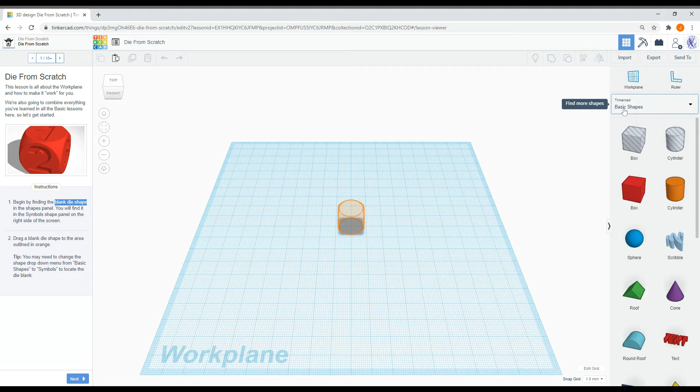So let's get started. Begin by finding the blank die shape in the Shapes panel. You will find it in the Symbols shape panel on the right side of the screen. I don't know what they mean by Symbols shape panel, but over here in Basic Shapes, there is a blank die shape, and that's what they've asked us to find.

So I'm going to go ahead and get that out and move it to the target. I'm going to zoom in a little bit and use the arrow keys on my keyboard to put that where I want it to be. There you go.

We're going to drag the blank die shape to the area outlined in orange. You may need to change the shape drop-down menu from basic shapes to symbols. I'm not sure what they mean by that. I don't see symbols in here anymore. I think they changed this menu. Anyways, it's right there under basic shapes.

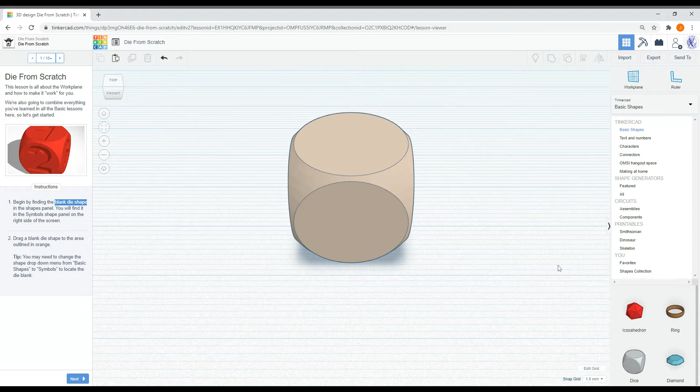Let's go ahead and do the next page. So, die from scratch. The following lesson is part of a bigger Tinkercad project. Check out this and more projects on Tinkercad's Instructable page.

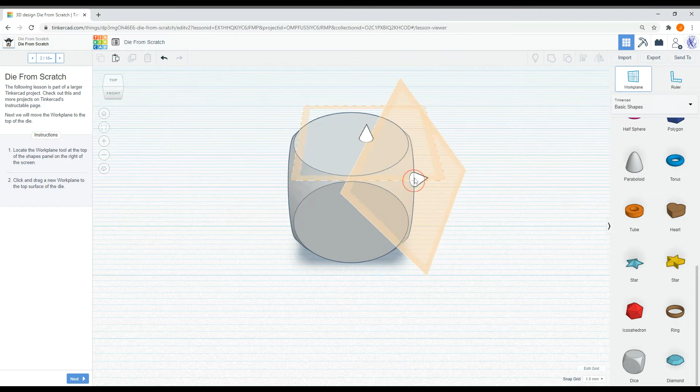Okay, so we're going to locate the workplane tool in the top right workplane tool, and we're going to click and drag a new workplane to the top surface of the die. I can put it on different surfaces of the die. I'm going to put it on the top surface. They even put a little white thing there to try to help you figure out where to go. Next.

Great job, right? So your workplane will now appear as if it were sitting on top of the die. And you can see that the orange graph paper does seem like it's sitting on top of the die there.

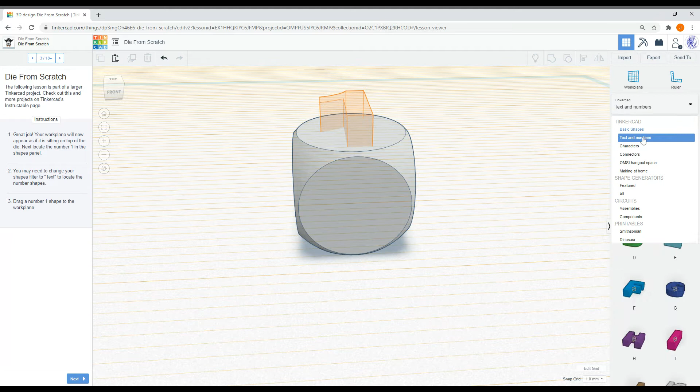We're going to locate the number 1 from the Shapes panel. Now, for here, we're looking for text and numbers. And we're going to go to page 2, and there it is, the number 1. You may need to change your Shapes filter to say text and numbers, okay, because we can do that.

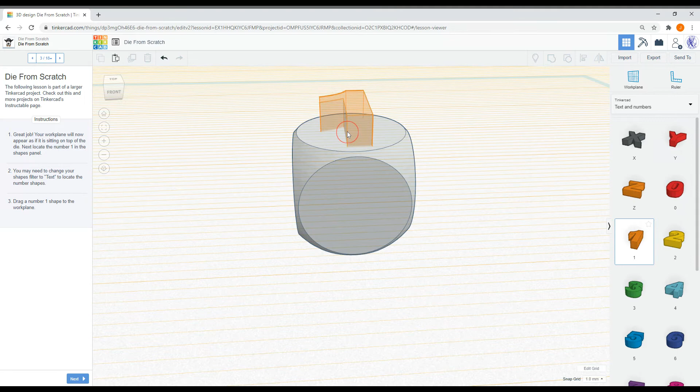And we're going to drag number 1 onto the workplane. And I can slide it around on the workplane. I'm sliding it around on the top of the die because I set the workplane there. All right, make sure that it's where you want. Adjust it with the arrow keys if you need to.

Okay, because number 1 is sitting flat on top of the die, we need to adjust it to make it cut away from the surface. So let's move the shape down 1 millimeter to fit in the highlighted area of orange. And you can see that they've got a highlighted target for us there now.

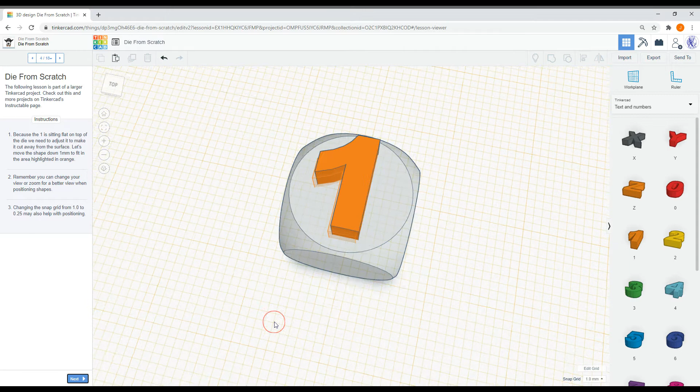So to do that, we're going to select the number 1. I'm going to click and drag the lift handle here, this black triangle thing, and I'm going to lower it. So it's -1. I've lowered it into the workplane 1 millimeter.

And we're going to move the shape down 1 millimeter. There we go. And then it's off target a little bit. You can see I'm having trouble using the arrow keys, getting it exactly on target. Taking steps that are too big.

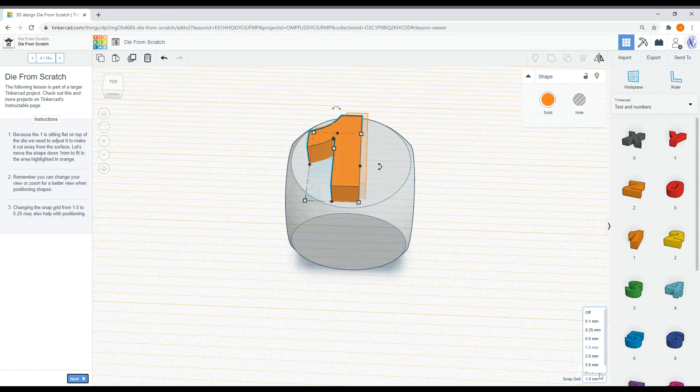To fix that, I'm going to change my snap grid. You should be used to changing your snap grid whenever you need to. We're set to 1.0 millimeters right now. I'm going to set to 0.25 millimeters. That way I can take smaller steps and be more careful about putting this exactly where I want it to go. Okay, so it's right on target now.

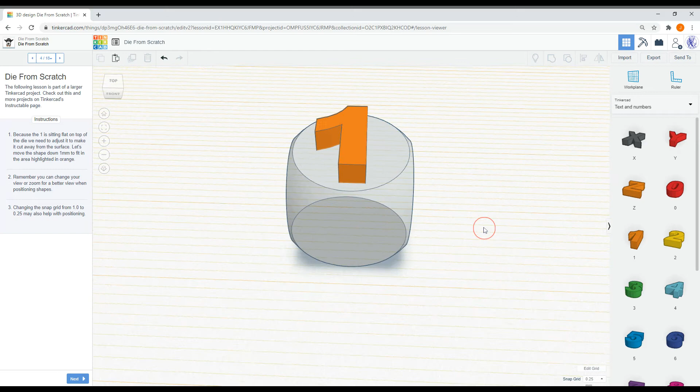Remember that you can change your view or zoom for a better view when positioning shapes. I recommend you do that constantly in Tinkercad. And they say changing the snap grid from 1.0 to 0.25 may also help with positioning. Well, it did. We already did that. Okay, I'm going to click next.

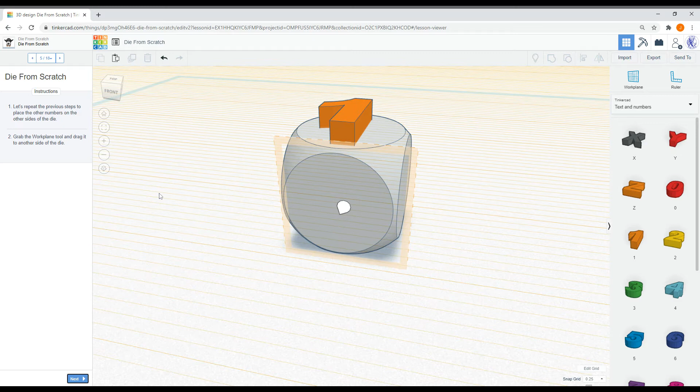Die from scratch. So we're going to repeat the previous steps to place the other numbers on the other surfaces of the die. Okay, so grab the workplane tool and drag it to another side of the die. There we go.

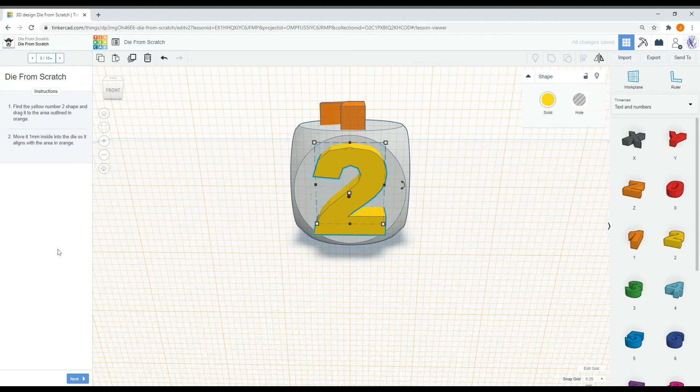Now we're going to get out another number, number 2. You can put out number 2 in the same way that we put on number 1, and we're going to move it 1 millimeter inside the die. Using the lift handle, I'm going to lower this by 1 millimeter, basically moving it into the workplane by 1 millimeter, and then using the arrow keys to get it on target.

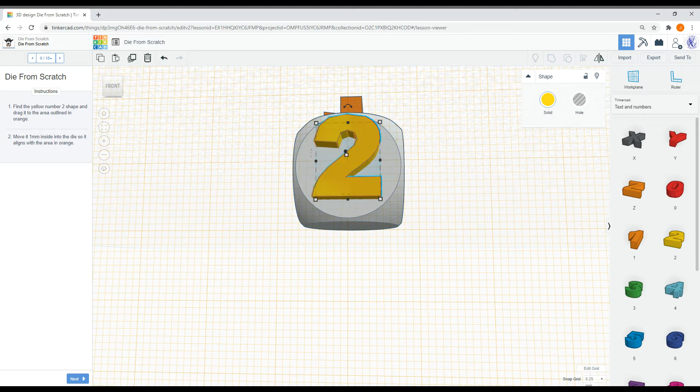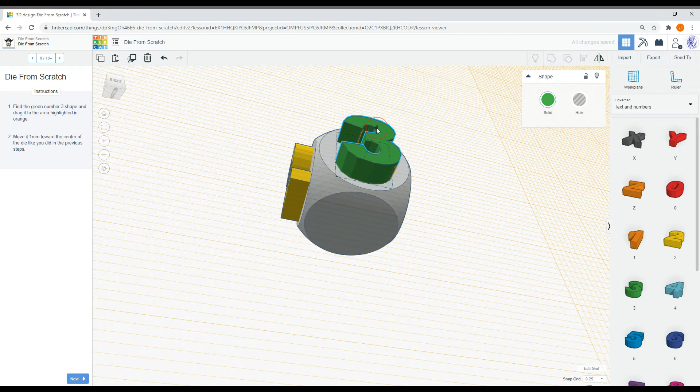Now we're going to grab the workplane and drag it to the other side, and then we're going to get out number 3. And then you can already guess what we're going to do, right? We're going to move it 1 millimeter down into the workplane. I'm going to grab this lift handle, move it 1 millimeter into the workplane, and then use the arrow keys to get it onto target.

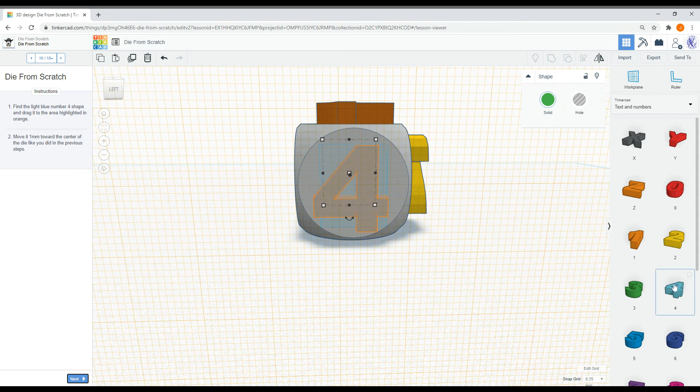Can you guess what we're going to do next? Grab the workplane, drag it onto the die. We're going to get out our next number, which is number 4. I'm going to drag it onto target. Can you guess what we're going to do next? We're going to grab the lift handle and lower it 1 millimeter into the workplane, and then make sure that it's on target. Looks like it's pretty good.

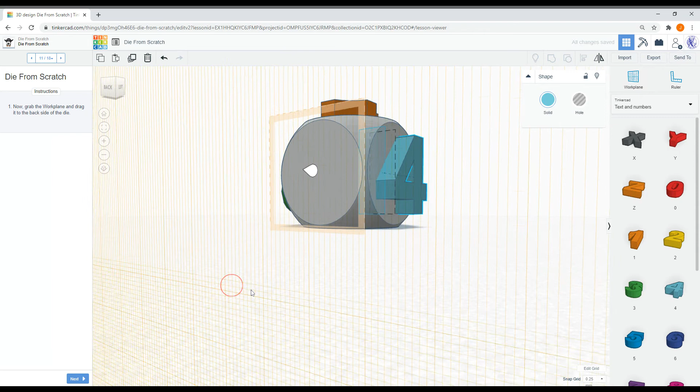And then we're going to do another number. Drag the workplane tool onto the other side, and now we're going to get out number 5. We can slide number 5 around the workplane, and then we're going to grab the lift handle, move this 1 millimeter into the workplane, and then make sure that we're still on target.

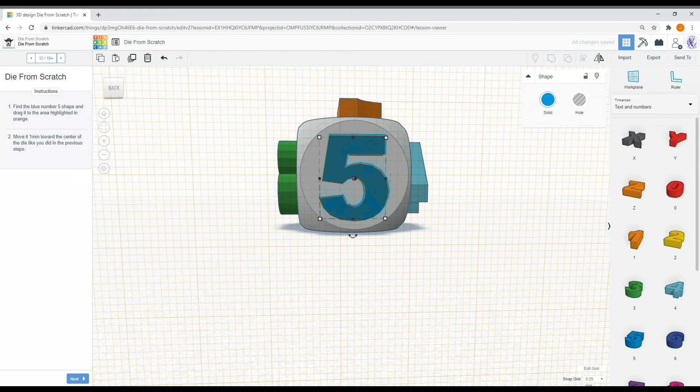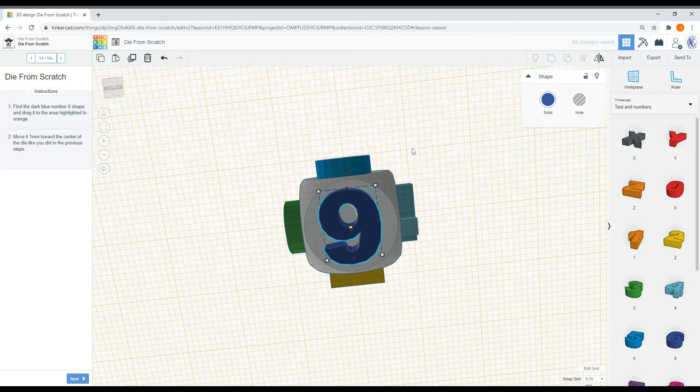Okay, and then we've got one more to do, right? So we're going to grab the workplane tool, click next, and grab number 6. I realized some of you might have thought I grabbed the number 9 -- when you're working with something that can be upside down or whatever else, just be careful what you're doing. I'm going to move this number 6 into the workplane by 1 millimeter, and then there we go. So now I've got everything on target and set the way that we want it to be.

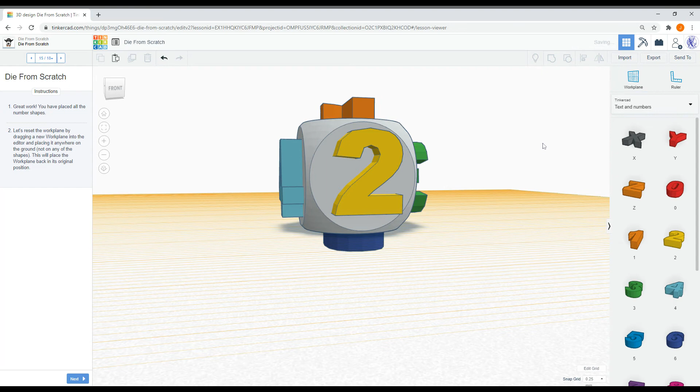So we've placed all the number shapes. Now we're going to reset the workplane by dragging it down onto nothingness. Come on, workplane, reset. There we go. That resets the workplane back to its original position.

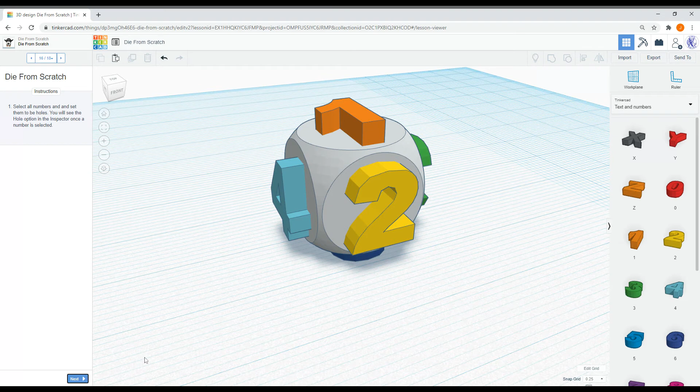Now we're going to select all the numbers and set them all to be holes, and they're going to create 1 millimeter cutouts in the die because of that. So we're going to select all numbers and then set them to be holes. There's more than one way to do this. You could just select -- we've only got 7 shapes -- select everything this way, hold down Control, and then click on the blank die to deselect that.

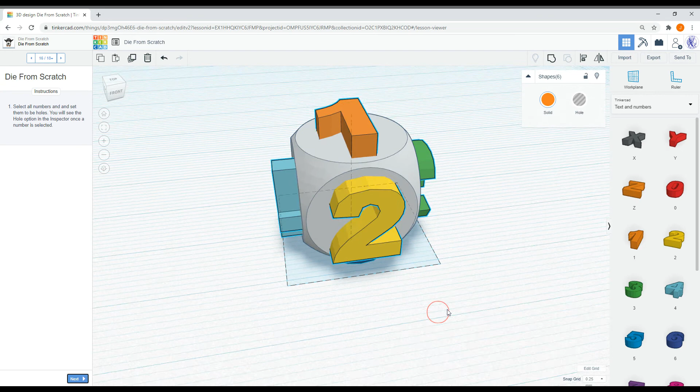Hold down Control -- sorry, I think it's Shift in Tinkercad. Hold down Shift and click on the die. So now I've deselected the die, and I've got everything else selected. By selecting everything and then holding down Shift, I can deselect something that's selected if I click on it. So now I've got just all the numbers selected. That's one way to do it.

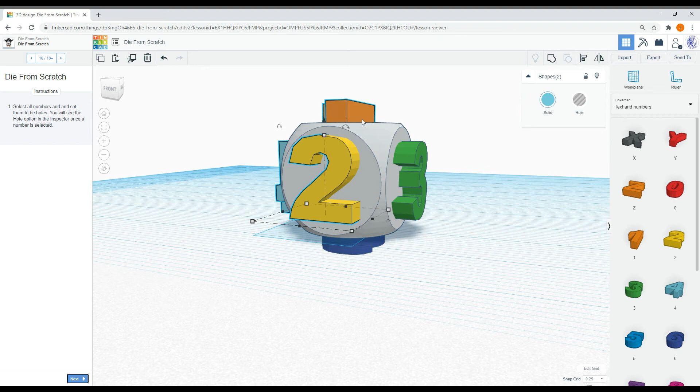If you prefer, you can just hold down Shift and click on the numbers one at a time. Just make sure you get the one in the back that we can't see. So I let go of Shift, hold down Shift, and then click on the 5. Now I've got all the numbers selected, but not the blank die shape. Now I can convert them to holes.

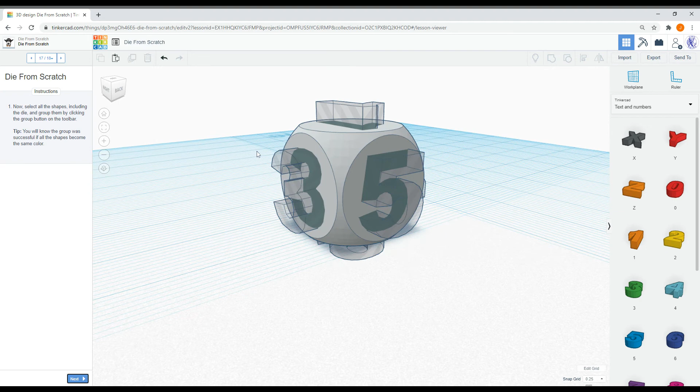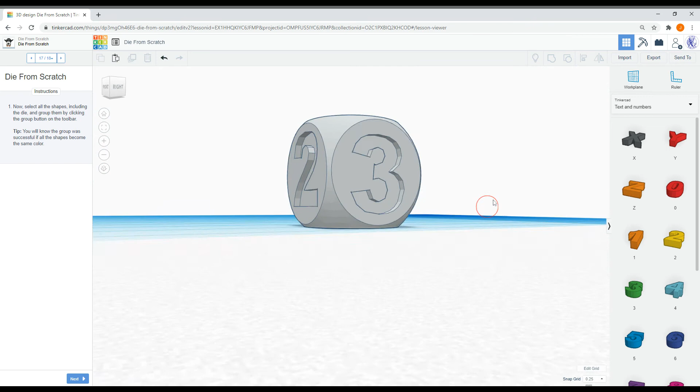Okay, so we've done that. And now we're going to select all of the shapes. I'm going to draw a rectangle around all of them, including the die, and group them by clicking the Group button on the toolbar. There it is, Group. Give your computer a minute to think about that if it needs it. And then now you can see we've got our cutouts made into the die, and everything seems centered and well positioned and is looking good.

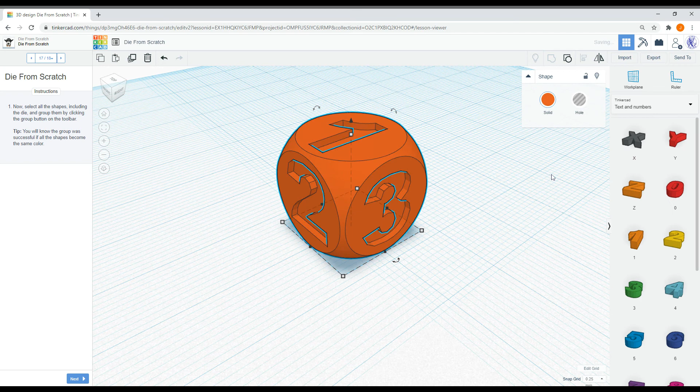You'll know it's successful if the shapes become the same color -- so everything is just one color now. Although if you want to change the color of your die, you can do this. This goes along with the idea, if we were going to 3D print this, of choosing what color plastic that we're going to use to print this with. Okay, so that's the big idea.

Then Tinkercad throws confetti up in the air, but please remember that does not mean you did a good job. Yours should look like mine does right here in the picture -- please make sure that it does. And you can click done, and then you're going to be done with your project.